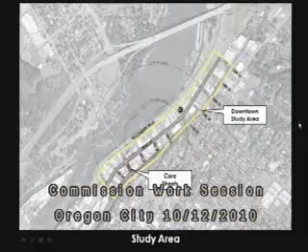Here's the study area, and the idea is to look at those core streets outlined in pink, and then think about the land use implications for the areas outlined in yellow — essentially from McLoughlin to the bluff. So the agenda is to look at these goals and then look at the refinement plan and discuss it.

The discussion part is the key, so we're going to move through it.

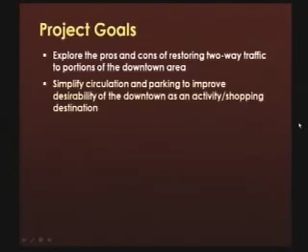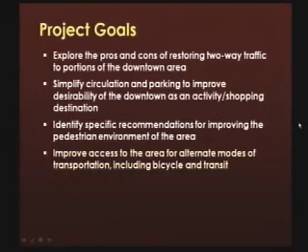The project goals look like this: explore the two-way Nancy mentioned, and look at ways to improve and simplify circulation. There's a sense that you can't get there from here in downtown, so how can we fix that and really improve your retail shopping district? The idea is to identify specific recommendations not only for cars but also pedestrians, and then look at alternative modes—not just cars and walking, but bicycles and transit and everything else that goes on in your downtown. And then look at how you move forward with implementation. It's great to have a plan, but if you can't implement it, it just sits on the shelf. Who wants that?

So the process and schedule looks like this. There are 4 steps, listed on the left. It started with some reconnaissance back in December, taking a look at the site on a real rainy day, and also meeting with the public in an opening workshop.

There were a range of comments we got from the community, all summarized. When we look at it, there were the top 3 comments identified: look at curbside parking and off-street parking—this is from business people—facilitate local access, and strengthen downtown businesses. These are all consistent with the project goals, so nothing new was found here.

From that, we did some background transportation work with DKS to get a sense of existing conditions, and then looked at projections while the bridge is under construction and being renovated, and long-term what this is going to look like in the future once things get done.

Then we looked at a series of alternatives—there's always a number of ways of doing it—and the idea was to identify different ways of looking at circulation in the downtown. Those were presented along with some additional analysis back in August.

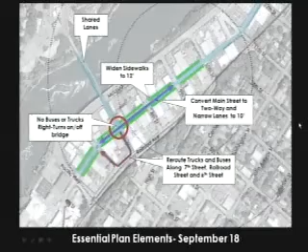That August concept started looking like this, and you can see ideas were looked at for all modes. I won't get into a lot of detail since it's been updated, but this was essentially the preferred alternative for the plan elements that came out of that, looking at a concentration of actions.

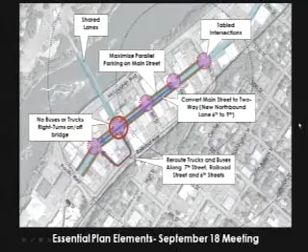After that, there was a need for additional research, and we brought it back to another public workshop on September 18th. Additional elements were then looked at, looking something like this—again looking at access, intersections, and alternative modes. We'll get into more detail later.

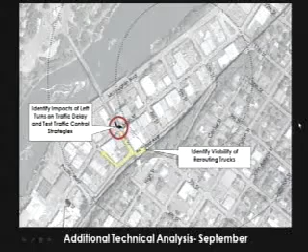On September 23rd, there was additional technical analysis done by DKS to look at some of those concepts, mostly looking at the geometry of the roadway, and also whether there are movements that are problematic in terms of congestion. Some of those were identified, and there were some findings as part of that. These are all part of the document we have, and we don't want to get into the details of this quite yet.

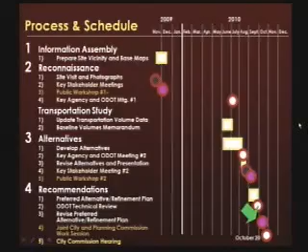So here we are on October 12th, and the idea is to get your comments in before we bring it back to the City Commission hearing on the 20th. Hopefully we've got enough time to do that, and hopefully it's close enough for minor refinements.

So here it is, the general circulation refinement plan that we came out with. When we started thinking about this, there were some basic issues we wanted to look at. There are 6 of these, and I'll go through the issues and then the ways we responded to each.

The first issue had to deal with downtown retail success: improve Main Street's drive-by access and visibility. That's a key component for making a successful retail street, to ensure your growing downtown gets even better over time. We do a lot of retail strategies around the country and in Canada, and retail is very formulaic. You either get things done right or you don't—it's not really an art, it's much more of a science.

So starting with convenient auto access, these are the things that all successful main streets have.

And that is the sort of Goldilocks and the three bears sort of thing. You can't have too much or too little of it. You need about the right amount. So when we look at this, we think about 5,000 to 15,000 cars. If you hit that sweet spot, that right amount of traffic, where it's pedestrian friendly but enough traffic so that you've got enough people going by the front doors. So those are the numbers that have worked for us around the country.

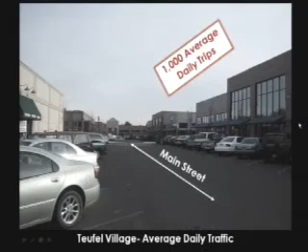So what are some examples of that, where you've got too little? When you look at Teufel Village down in Wilsonville, they tried to create a main street down there, but they didn't design it very well for auto access. As a result, they get 1,000 average trips a day. So as a result of that, 5-6 years later, they have this condition, blank storefronts. So we don't want to do that. So the traffic is important.

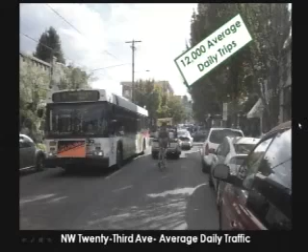So then you think about the low end of that. You see emerging main streets, and if you've been into Portland and looked at North Mississippi Avenue, that's just at the bottom, 5,000 average daily trips a day. You look at Southeast Belmont, looking at two-lane streets here. Something similar to what you have in Oregon City. Southeast Belmont in Portland, 10,000 average daily trips, still in that sweet spot. And you start pushing the edge, you're at 23rd in Portland, 12,000 daily trips. So you get these sort of conditions that are really good for retailers.

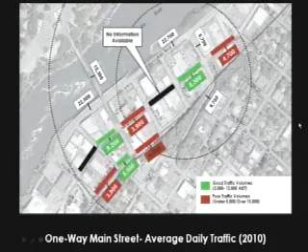So then looking back at the information that DKS assembled for us, you can see how those streets relate to that 5 to 15,000 criteria. Where you see green, those are meeting the criteria. If you see the red, those are outside the criteria, largely below the level we want. And black indicates areas where there was no information. So you see there's a patchwork of some green streets and some red streets. So what are the solutions to deal with that?

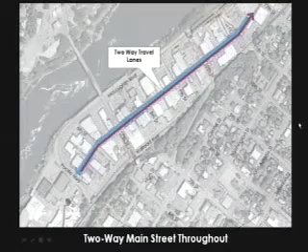Well, if we would like to get more main street traffic and get it up into that area, one way to do this would be to do two-way streets. And so the proposal was that we look at being two-way, travel from Pacific Highway down by the mill all the way up through downtown, at least the 12th and beyond. So that would be a two-way travel.

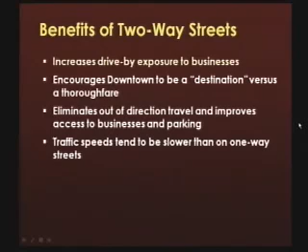And so what does that do? Well, here are the benefits of two-way, and this has been documented by a number of traffic studies throughout the country. And the key one of this is highlighted in yellow: increases drive-by exposure to businesses, okay? And so there's some other ones you see listed there.

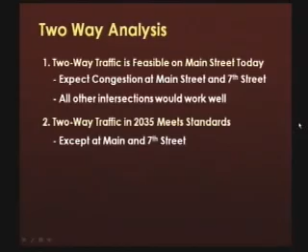We'll get into that. So when we did this analysis, DKS looked at this, the technical analysis of does this create problems by going two-way. And the answer was really no, it doesn't. Really, the two-way traffic has feasibly got the capacity, and you've got the ability to deal with level of service generally at all intersections, with maybe some congestion at Main and 7th. So that would be some of the issues that we need to deal with. And then even looking forward out into 2035, to meet all the standards, even long-term besides short-term. So it's a good short-term solution and long-term, as long as we can deal with some of these congestion issues at Main and 7th, okay.

So when we started looking at those numbers, the thought was, now, if we could get it to two-way, what is the effect of that?

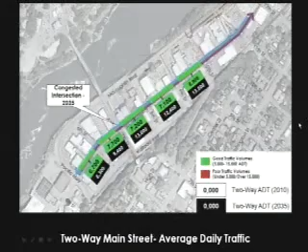So you see green, again, is indicating that traffic volumes are in that sweet spot, 5 to 15,000, and it's just right in the middle. You can see this traffic volume, 6,000, 7,000, and 8,000 as you get closer to 10. So that's all good news from a retailer and a downtown business vitality standpoint.

So the second part of this is to deal with not only the car and drive-by, but how are you dealing with the sidewalks and safe crossings for pedestrians? That's a high-quality pedestrian environment. Typically when cities are traffic engineered, you see this prioritization of vehicles over pedestrians, and pedestrians get the short end of the stick. What I try to do is what successful downtowns do: reverse that equation and say pedestrians are the priority. You need to provide adequately for bicycles and cars, but you really think about your downtown differently if you start with pedestrians first.

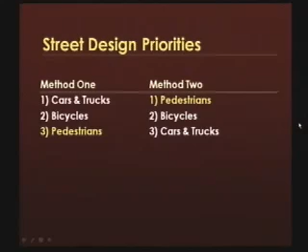And what does that mean? As a result, we find that in highly biased pedestrian environments, investors are attracted to those pedestrian-friendly streets. So what does that translate into for a pedestrian-friendly street?

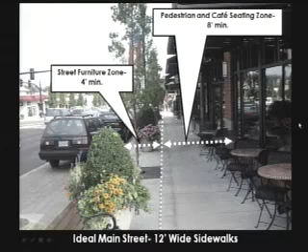Ideally, you'd like to get this: zones on your sidewalks, areas for street furniture, lights, flower pots, newspaper stands, bike racks - all those things should go along the sidewalk. To accommodate that is typically about 4 feet. Then if you want an active environment with people sitting outside at cafe tables, you need about 8 feet, because you need to clear a zone for people to walk and people to sit, so you're not weaving and jiving around them along the street.

And what you have in the downtown today is probably not ideal, frankly. You'd really like to have 12 feet of sidewalk, but there may be ways of dealing with that condition. Just so you know, that is not an ideal condition.

So what would be ideal would be to widen these sidewalks. Unfortunately, the timing and cost of this could be very considerable, because you have to deal with drainage, electric utilities, and signalization. It could be very expensive.

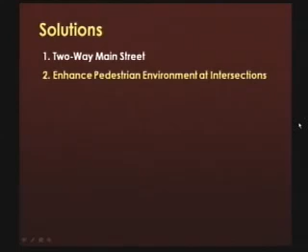So the issue at this point is how can we make the sidewalks as pedestrian-friendly as possible with the existing conditions, considering you don't have the time or maybe can't afford the cost to make changes to reach that ideal. At a minimum, what we'd like to do is enhance the pedestrian environment at intersections, because those are the conflict points. There are really three things we'd like to see, and this is what we call tabling intersections - extending the sidewalk through the intersection so pedestrians don't step off the sidewalk, creating a sense that the sidewalk moves through the intersection.

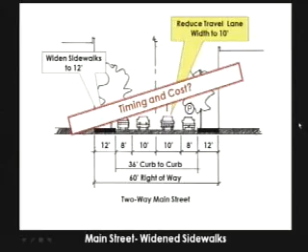Yes, you rushed by - if you could go back, you kind of rushed by your timing and cost for this issue, and I'd like a little more detail as to why you think that's the case for Oregon City, given where we stand today with timing and cost.

Well, the timing and cost issue is that we're trying to deal with some projects we need to address. As we get into implementation in the presentation, some things need to happen short term, and we need to adopt other things for the long term. The issue is that for short-term improvements, we don't want to have to tear out and rebuild, so we want to keep the project moving forward.

I mean, is it the fact that the bridge is closing? Is it the fact that we've already invested and were already tearing up the streets on this Main Street project? What is it that causes you to say we don't have enough time?

The timing is that we'd like to get some things done by the end of the year, which is essential, and the cost of those would be considerable. It's not a minor cost to move a curb line - it's a major cost, and it may have some implications as part of it. However, we have done some cost estimating, and that's part of the appendix material.

So if you're interested in those costs, certainly we've got that available for you.

I just wanted to add, in terms of timing, there's the other aspect of how much can you afford at one time. Because of the much higher cost to do 12-foot sidewalks, there's no way we could do them all at once. We couldn't even do them in 2 phases. So the timing is, you won't have the sidewalks all done together. There'll be some done, it'll be a patchwork, the drainage will be kind of odd. And just to clarify, the work being done on Main Street today is actually a stormwater and sanitary sewer separation project, so we're not doing sidewalk improvements.

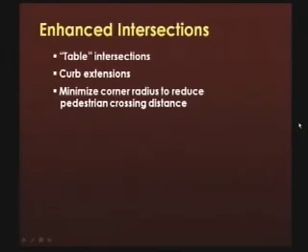So the second part of this is dealing with those intersections we talked about, starting with what we call tabling—continuing the sidewalks through the intersections—curb extensions so we minimize the crossing distances, and then reduce corner radius, which also helps.

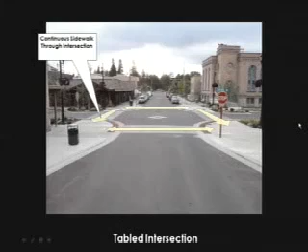What's an example? This is a project we just recently completed in Montana. Here's an example of what we're talking about, that sidewalk continuing through the side of the intersection. As a pedestrian, you see through the use of materials and grade that it isn't a stop and start—you continue through the intersection.

When we talk about raised intersections, this is really about raising the intersection up, sometimes as little as 4 inches, to meet that sidewalk, so you just walk at level. This has a lot of universal access and handicap benefits, and surprisingly even maintenance benefits. In snowy areas, the snow plow drivers appreciate this more because they don't run into the curb—it's actually a better way of going about it.

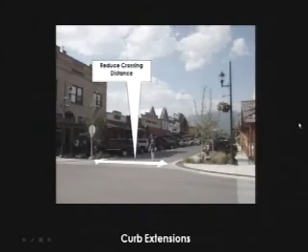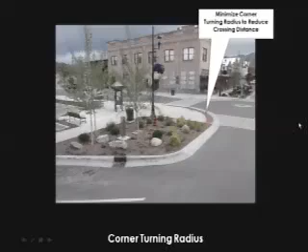And so the curb extensions look something like this, and the idea there is to reduce that crossing distance so you have a small distance to cross and less conflict for pedestrians. The corner radius is as tight as possible, considering that you should be designing for the appropriate vehicle. Designed for a UPS truck rather than an 18-wheeler. Okay, so that's the idea that we're trying to illustrate here, reducing those distances where you can do it, where it's reasonable.

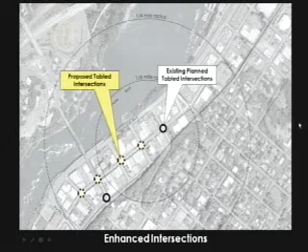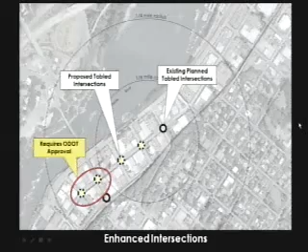So the tabled intersections, there's some that have already been planned, by the way. So there was one already at 10th and also down coming down the elevator where you see those open circles. And there's some proposed areas that are indicated by yellow circles. The only issue on that is that this roadway in part will still be controlled and regulated by ODOT, and that would happen at 7th and 6th. So those would probably be a later phase, pending some approval by ODOT as they go through an additional process.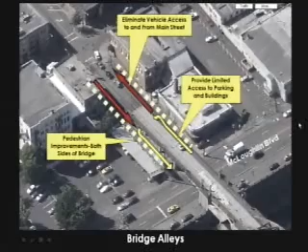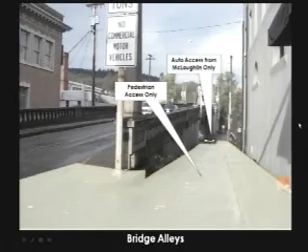When we think about the bridge itself, there's also some ideas that were thought about as far as the alleys that are adjacent to the bridge, and they're kind of wonderful spaces that could be treated better. So I think some of the long-term planning has thought of connecting the river all the way to the elevator, and this is sort of a missing link. So the idea here would be to eliminate vehicle access, except for maybe loading vehicles and emergency vehicles, and really make this a pedestrian-friendly alleyway. So the area would be in through here, and largely limit your auto access from McLoughlin only. So you come into that parking that you have under the bridge at that point. So these could be some wonderful spaces that would be a nice connection down to the river.

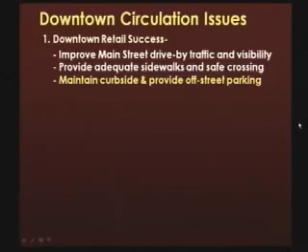Maintain curbside parking and provide off-street parking is another issue. So as you know, if you go to two-way, it has some profound implications on your existing angled parking. Developer-friendly parking is the key that we look for, and there's some things that we look at as a basis when we start looking at parking plans for downtown. We know you've adopted a parking strategy for your downtown, and this is largely consistent with that.

So what we do is start looking at a successful typical Main Street. And that typical Main Street usually is about this long. So it's a walkable distance where you see about 5 blocks of development, and it's edged by retail development. It's typically about 60 feet deep. Your buildings are a little deeper, but to work this out, we see typically modern retail has this, and you have anchors at each end. So that gives you an area of about 96,000 square feet of retail. And that would require about 480 spaces if you wanted to compete with the malls. So you need a lot of parking. Frankly, as walkable as we want it, you need to have an adequate amount of parking. And you can provide that for this area, even though your demand might be about 480 spaces.

So when you've got your on-street parking, you're going to have a shortage of about 300 spaces, so you need to find a place to locate that. So your on-street parking, we describe it as a 35% solution. You can never park all the parking that you need for an ideal situation on street. So your long-term strategy, as you've discussed in your parking plan, is to identify some off-street lots, and even, when you get very successful, at some point a parking structure that serves your retail areas and is located correctly. So in the short term and long term, we want to make sure that we preserve and enhance the curbside, because that's the most important parking for any retailer.

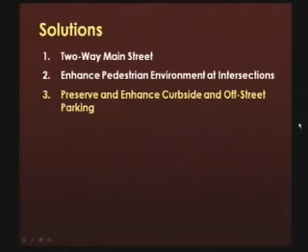Because if you're like me, you'll come downtown and you'll circle around the block and say, hopefully I won the lottery today and I got that parking space in front of the business I'm going to. But if I don't get that, I've got the ability to go around the corner to a lot or someplace else. But you want to make sure that you preserve that on-street parking and add to it wherever you can, so that you've got spaces in front. It's not necessarily the amount that you have in front of a retailer, but the ability to get some, because you can't, as I mentioned, park it all on street. So the approach here was to do what we described as no net loss of curbside parking in your downtown.

So what we're suggesting is that there may be some loss between 7th and 9th Street by going to two-way because it's currently angled, and we want to make that up somewhere else in your downtown. So we wanted to maximize that on all other block faces, and there's a couple ways we think we can do that. So here's the proposal for Main Street curbside parking. It'd all be parallel. We get rid of all the angle.

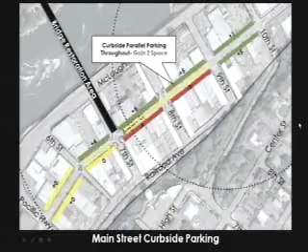So the idea here is if we can eliminate some of your loading zones, some of your bus bays, and some of the other things. In fact, we think on this stretch of road on Main Street itself, we can gain 2 spaces, surprisingly enough. We've got a lot of wasted spaces, got alleyways and other things like that that we've maintained and worked into this also.

So the second part of that is a strategy long term is to say, where would you park off-site? And so we know that in your parking plan you've identified some sites where you might do some shared arrangements with your existing owners. And long term, you really need to reserve some areas for public parking, and those are indicated in yellow here. So there's a series of those.

Before you go to buses, Don, my lingering recollection, and people can correct me if I'm misremembering, was that in the parking study, they calculated that we could solve our parking problems without a structure. Well, that assumes that you have your current growth. What we like to do is to assume that you plan for success.

And so if we were able to get the amount of retail that we indicated of 96,000 square feet, which is pretty consistent with a regional center that you need to have to be a retail draw. If I was a retailer and I did a national study and said, I want to draw national tenants into your downtown, they will only go into places where there's a critical mass of at least 96,000 square feet. Ideally, it needs to be about 125. So it expands your market and who you can recruit into the downtown if you've got the ability to have a lot of retail and you've got the reserves identified for parking.

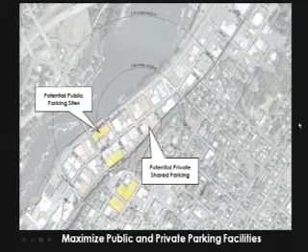Can we get some more numbers from you? You said, as far as downtown being a regional center, what was the required square footage of regional? Well, what we've identified here would be a good number, 96,000 square feet. And what is the downtown now? I couldn't tell you right off the top of my head. Lloyd, do you know? No. Okay, so 96,000. Yeah, and that's about a 5-block area. So you can accommodate that into your downtown.

Okay. So when we start talking about getting parking, one of the issues has to deal with the buses, because bus pullouts equal a loss of curbside parking. And in fact, we know from our conversations with TriMet, the pullouts are not even desirable. They prefer not to pull out of traffic because it slows the buses down and they have to pull back into traffic. So the idea is if we can locate those bus stops at curb extensions, which we're providing, it's even better for TriMet. So it's a win-win sort of situation.

So the idea is, where can we do that? So we see that circle between 6th and 7th, that could be moved out. And then you have your trolley.

And the thought would be, that's a great service that you have right now. During non-operating hours, let cars park there. So that gives you quite a few additional, and that's especially good because then you've got evening hours and other times, that's a great reserve to pick up some more parking there.

Okay. So then finally, the circulation idea, we need to look at turning movements at Main and 7th. So this is a study that we looked at. An issue has to deal with large vehicle turning movements, your big trucks going through, essentially. They are not necessarily coming downtown unless you're a beer truck or a UPS vehicle. We need to deal with those. And then the left turns from the bridge, when they occur, may cause delays.

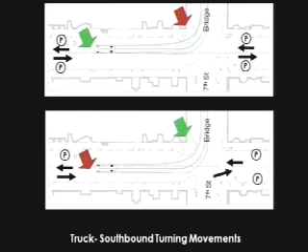So then the bottom illustration says, well, let's preserve the pedestrian environment and maybe let's swerve the traffic to the south. And you can do that, but what that does is remove the parking on this block here, because then you have to swerve back up. So you could angle this side, but it's not ideal. So there is a trade-off here. So the issue is we don't really like this. If we're going to go to 2-way, we need to find a more creative way of dealing with this traffic, because in a sense, this is a non-starter. This is just not acceptable. So, as we say, not acceptable there.

We also looked at it on northbound, and generally the conditions are a little bit better, obviously, because you've got a little bit more area to turn. So the top one for the truck, you can make it work for the pedestrian, cutting into your existing curb extension, but we're going to cut that back anyway. Okay, so if you were then to really move to the south, you could also do that too. So we've got two conditions, but it's less extreme for going northbound on Main.

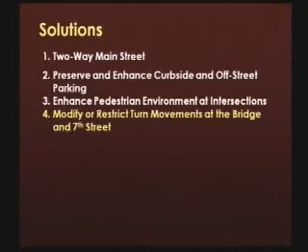So what we said is let's modify or restrict turn movements on the bridge and 7th Street to avoid that whole problem. So what can we do to get trucks through the downtown without creating that mess at that intersection? So here was analysis that DKS did, and it looks something like this. Large vehicle turn movements impact on-street parking and sidewalks. So what you can do is restrict right turns for trucks and buses and reroute the trucks and buses from that intersection. The other piece of this is to expect major vehicle queues on the bridge approach.

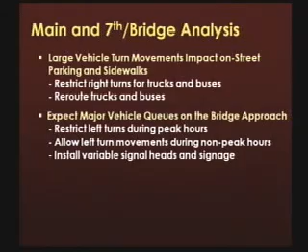And what do you need to deal with that? Okay, so there's some restrictions as you see listed here. We'll get into more detail here. So this is just a list for you to take a look at. Okay. So here's the idea. At that intersection, instead of allowing those trucks to come off the bridge and turn left here, right here, and left here, let's just run them straight through.

So what you have on 7th Street today, let's make that a two-way street and run those trucks and bring them around the corner to Railroad, a very wide street here, and bring them back down, and then reverse the direction of 6th, and bring them back to Main. So essentially where you've got this roundabout circulation pattern today, we've reversed it.

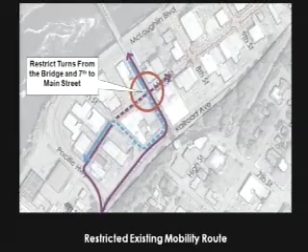We've reversed it so the trucks can go this way and cars can make that turn. So we need to figure out a way to sign that so it's clear for trucks to know they can't go that way. We can do some physical things by putting restrictions on the corners through barriers, bollards, and other things on the curb, but ultimately we need to be able to sign it correctly.

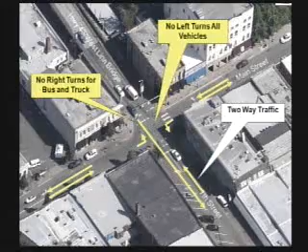So looking from the south to the north side of the bridge, you can see this is what we're suggesting for movements. And what we'd like to do is reroute those trucks to not include this, have it do this, and those trucks would do that. You see again here.

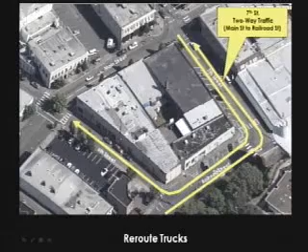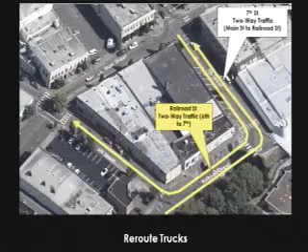So the issue starting to emerge is what do you do with these corners to get the trucks around it, because are we just transferring the problem? That was one of the issues ODOT started asking us when we showed this two-way traffic movement and reverse flow. Of course, we've got this little planter in the middle we have to deal with too, we'll talk about that in a second.

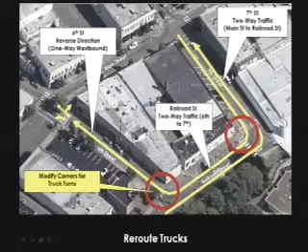So what we said is to do this, you really need to modify these corners to make it work, and also probably the parking through here too, to make that work. We think that could be done, and the analysis looked at it, and we'll get into that in a second.

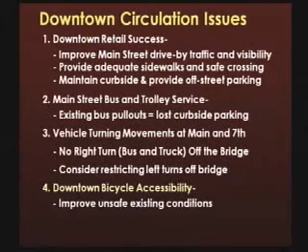Beyond that, we said the downtown bicycle accessibility needs to be improved too. So we've looked at cars and trucks and pedestrians, so what can we do for bicycles? We'd like to see a lot more people cycling through your downtown.

So today, this is what you have. You have signed routes, essentially a sign on the pole that says it's a route. Not much improvement other than the signing. You see that on Main and on 7th, and you can get up and down the elevator.

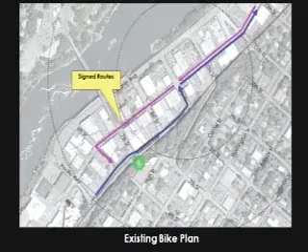So the thought was to incorporate what we call sharrows, or a shared roadway for bikes and autos, along Main and then the bridge. The idea is these would be the new special routes for bikes through your downtown, indicated here in blue.

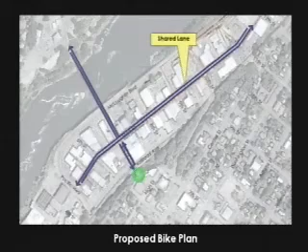So what are the design requirements for this shared lane or sharrow, which is kind of an odd word, but it's a designation on the road, I'll show you in a second. There are requirements in the design manuals that traffic engineers look at: they're only applicable for roadways of 35 miles per hour or less, which means your downtown, Main Street, is eligible for it. The bikes would share the lanes with the cars, something like you see on 23rd.

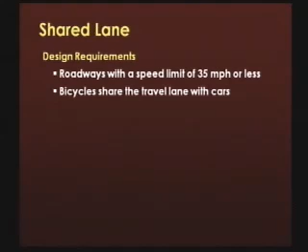So what does it look like? Here's that sharrow, it's got the bike symbol with the little chevron on top. Those occur once or twice every block, and they could even occur on a bridge in some instances.

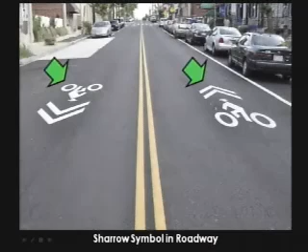And sometimes, if you have traffic congestion at an intersection like 7th and Main, you use something called a bike box. If you've been to Portland, you might have seen some of these, these green blocks that hold the traffic back so that bicyclists are always visible to the stopped vehicle. There might be some additional signing added to that. So it's a full array of things that could be done.

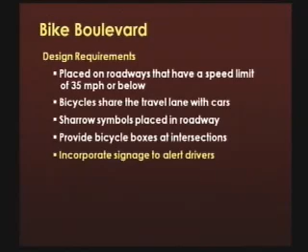The key piece of this, we think, is really the connection onto the bridge, because there's 5-foot sidewalks and you really can't share a bike and a pedestrian. So going over the bridge really is the key piece, to get those sharrows on it so that cars can anticipate the cyclists.

There are some other considerations we thought about long term for improving access into your downtown. One deals with maybe a left turn. This is part of your adopted enhancement plan. It's more of a long-term project, but as you know, if you're coming on McLoughlin and don't turn at 10th, there's no clear indication you can get into downtown until you get back down to Main by the Mill. So the thought was, and this has been approved as part of your adopted McLoughlin plan, sometime in the future you need to revisit this and think about access improvements for autos and pedestrians at 8th Street. This is just a reminder.

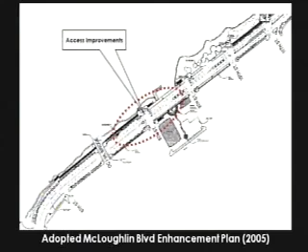It would also be helpful as a next step to look at some additional two-way streets, because it's confusing to enter your downtown on a one-way street and be confronted with a street that forces you to make a left or right turn. So we suggest further investigation of two-way streets on these indicated, especially 8th and 9th, and possibly 6th. It may be a bit more difficult on 6th because of geometry, widths, and circulation issues we haven't investigated, since you've got a corner on the roadway there on McLoughlin to deal with.

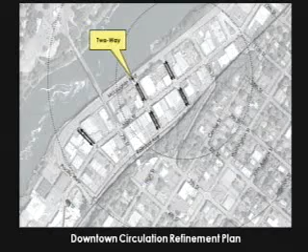But at a minimum, look at the arrows we indicated here. The pedestrian alleyways are another piece we talked about, in addition to along the bridge, where you've got opportunities for some funky or special spaces that could contribute to the success and character of your downtown once you get Main Street up and going.

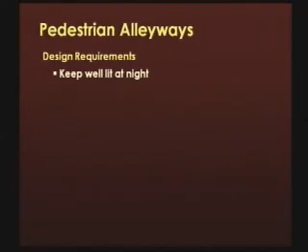So maybe restrict the vehicle access to deliveries and service vehicles. The everyday auto access isn't here, but it's just service vehicles, kind of what we have here. There are ways of doing that with a card gate or some other means.

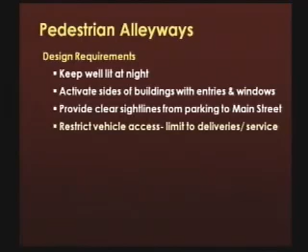So the next piece is I'm going to pass it off to Jason. You've probably heard enough of me, and I'm going to let him talk about implementation. I'll try to bring you to the end here. And Don's really set us up for what are the critical elements.

This issue, and the final issue, is really the bridge restoration. How do we implement the street improvements knowing that the bridge will be closing, and how do we successfully do that within the 2-year period while it is closed. It's important to think about what we can do now for the day, January 15th, when the bridge is closed, and then what that means in the long term, so that improvements we do in a first phase don't have to be redone in a later phase, but are actually sequenced and work together.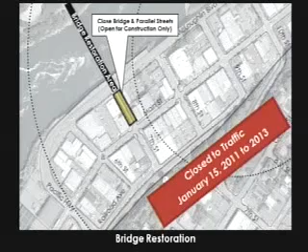So what we've identified are what we call near-term projects and 2013 projects, 2013 being the year that the bridge would be open. The near-term projects really have to deal with this closing date of January 15th, 2011, and what the impact of that loss of 15,000 cars a day will mean to Main Street.

So we know the issues to address certainly are that drive-by traffic, visibility, and on-street parking. We had Carl look at the implications of bridge closure on your Main Street, and you can see that the traffic numbers are pretty dire. When we're looking for totals between 5 and 15,000, we're seeing much, much lower volumes on Main Street, and that will have a profound impact on your businesses.

That's existing one-way. The good news is that just by converting to two-way, we're seeing more than doubling of those numbers, and we're getting a lot closer to what we think is healthy traffic volumes to support your downtown business. So that's the plus side, that if we can convert to two-way, we're going to see some benefits for visibility.

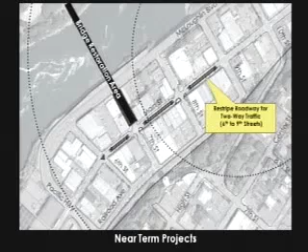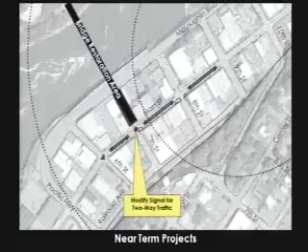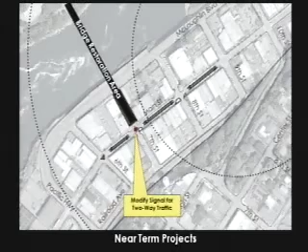The other issue to deal with is replacing the signal at Main and 7th, because as we know, it's designed today for a one-way system, and that would need to be modified slightly, either with a refinement of the signal or stop signs that address traffic flow from this new direction, that is traffic coming from the south to the north. So the cheapest and simplest way in the short term is just the stop signs there.

We know obviously that the ability to restripe your parallel parking has some advantages in terms of adding some of that parking that we lose by going two-way. You have angled parking today between 7th and 9th. With a two-way street, that angled parking will be converted to parallel. And how do we maximize that parallel parking so that you're not losing critical spaces on Main Street?

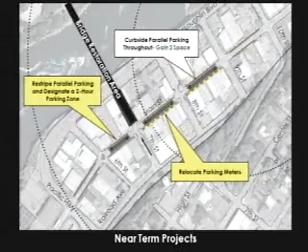So between Pacific Highway and 10th, we think that just literally restriping and designating for 2-hour parking is critical because 2-hour parking is important for your downtown retail. So we don't want extended long-term parking on Main Street, we want high turnover. And of course we'll need to relocate the parking meters that you have today in the angled section between 7th and 9th.

Relocate or replace. That's maybe relocate or replace.

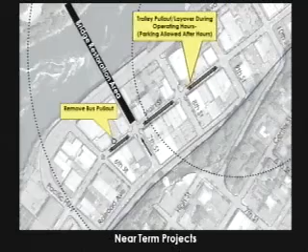In terms of the Main Street bus and trolley services, Don had mentioned earlier, we think that removing the bus pull-out between 6th and 7th will then give you the ability to add some additional on-street parking, and of course allowing for that trolley layover to be used after hours for downtown parking would be a tremendous benefit.

We've also looked at a fairly conservative cost estimate for these near-term projects, which you see here. It ultimately comes up to around $200,000. The biggest piece of that is relocating parking meters and redoing your curb extensions that you'd be replacing between 7th and 9th. But this is a reality check for us that there will be some costs involved in making these improvements.

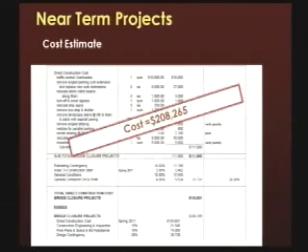I might add that cost estimate is for replacing them with new modern meters. So if you move them around for this temporary fix, it would be quite a bit less. Would those new modern meters be solar?

And that's something you need to do long term. So instead of doing it twice, the idea is if we can get a reasonable cost, and the $208,000 seems fairly reasonable to get the things that are a long-term project as an initial piece. It seems like that would be the right thing to do at this point to get the new ones in.

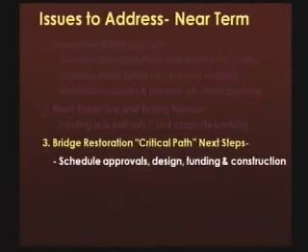So we've talked about costs, we've talked about what the elements are, and we've put together what we think would be a likely schedule in terms of implementing. What are sort of the hoops we need to jump through, what type of coordination and organization we need to put together so that we can begin doing these near-term improvements.

We've been in the process of technical review and approval with ODOT, so we're well into that process, which is the first item. An additional element would be a traffic control plan. ODOT has designed it for a one-way system, and if you go to two-way, the signs they put up during the closure period will need to be adjusted to address the change in traffic flow. That would take a couple weeks for them to review and put together a new traffic control plan.

Are you done with your description of how to get more traffic on the two-way street on Main Street? Can I make a suggestion? There was something I thought was self-evident that I didn't hear you say. Okay, good, let's hear it.

Can you go back to your graphic aerial of Main Street? It will take a sec, but I'll get there. You want to see the traffic numbers or any area? Well, yeah, that number is going to be fine.

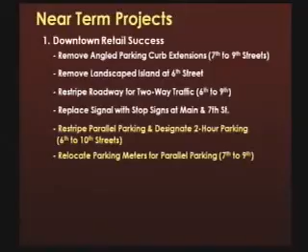So you indicated that the mere fact that this becomes two-way would in and of itself boost numbers to the ballpark of 5,000. But I don't know what the numbers are on 99 - that's a big flow of traffic. If you want to get from 5 to 15,000, wouldn't there be some way to entice people? There are a lot of motivations for driving along 99 - some people are commuting, some are touring. You don't know who is in each car, where they're going, or what their intent is.

But it seems to me that if there were a way to form a gateway, like a gateway arch or something really stunning at Main and Pacific Highway on the south side, and something similar on the other end, with a sign that says historic downtown Oregon City, people would be drawn out of curiosity and interest to make their trip through Oregon City along that two-way Main Street rather than along 99.

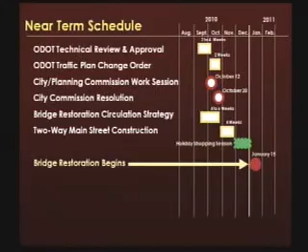Yeah, and Lloyd, do you want to come up to the microphone? I think on the schedule you first put in, I think we had 3 meetings. Chris, to answer your question, Lloyd Purdy from downtown. Crandall Arambula has been outstanding about keeping communications open with downtown business owners, many surveys, many public meetings, and several of you have been to some of them, I've been to all of them.

With that said, let me remind you of two things. Yes, it's an aggressive schedule, because our other partner in this project, ODOT, only responds to deadlines, so it's incumbent upon us to set some aggressive deadlines. Two, we're talking about returning to the two-way Main Street, the way Main Street used to be when it was a retail downtown, and we're rediscovering our retail character downtown.

Many of the business owners and property owners who have been there for hundreds of years, like the Bushes, say, oh yeah, we remember when that was that way, we loved it. I think what happened was when the county was operating downtown, we returned to a one-way Main Street to create parking for county services. We no longer have that need and that capacity, so we are in fact returning to a concept that supports retail downtown.

With that said, Chris, not every business owner loves the idea. Any business owner that's going to lose a parking spot in front of their 15-foot window front either doesn't like the idea or isn't quite sure. It's an issue of: do we show leadership for the health of all of downtown?

But they've done plenty of outreach. Leadership, but also at least give them the opportunity to have their voice heard and maybe even address some of their concerns. We've done surveying, meeting 3 at least, announcements. Yeah, I've done as much as I can do, even personal visits, and I still continue to do that. We can keep up, but we've probably hit the threshold on that.

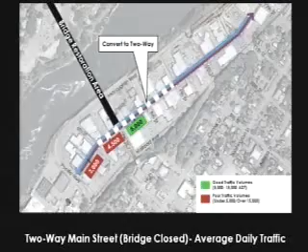So this is one way, okay. And then if you go to two-way, it's close. See, 4,500 is close. It may be a rounding error. And I think if we do some of these other things that have been suggested, signing and other things to encourage traffic, we can get that number up. But we feel a lot better about that rather than something that's way down in the 2,000 numbers.

And when the bridge reopens, that's when the big payoff comes in. Because that is the section of downtown that needs a little more help. That's dragging behind everything. Yeah, dragging behind. Great, any more questions?

Curious if the speed limit will change on Main Street. It might slow down a little bit more. Is there a speed limit on Main Street? Stop and go. Does anyone know? It's 25 speed limit. It's not posted because it's a downtown district. We find that the two-way street, on-street parking, creates enough friction that you'll notice slower speeds. Challenge to go 25.

I was just going to suggest, since ODOT is such a critical stakeholder in all of this, and we have a representative of ODOT in the room, I want to invite her to speak. She came in after we started, so thank you for reminding me. Nicole Curtis, she's a senior planner with ODOT, and she works with the city on all of our land use applications. Thank you. Do you have anything to add on that?

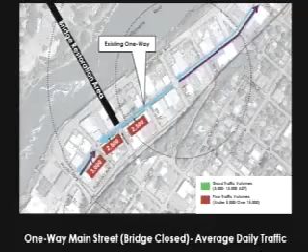Just a quick one. I think if the notion is that we might have parking spaces where we have the alleyways on Main Street, that decision has to be made quickly because we don't want to move parking meters two times. Right, I agree with you. And you've got to talk to all the business owners there that are on the alleyways. Well, I heard support for it. What we need to do very quickly is meet with everybody that would be impacted, find out what their needs are, and see if they can just access from the alley and not through the street.

I hate to have my final comment be about money. The elephant in the room is the cost and the funding, and we have not identified funding yet. But I do know that ODOT, through the TGM process and even through state economic development, are really trying to see if there's some kind of funding available to assist the city with some of this work. There's no promises being made, but they're awaiting what the city's desire is for the downtown. I think there's a possibility of partnership for funding, not sure yet though.

So even if we pass this next week, when this is going to be before us, we don't have money to start at this point. Okay, let's be clear. Well, that's our time. Thank you very much. We'll have an opportunity again to review in a week.